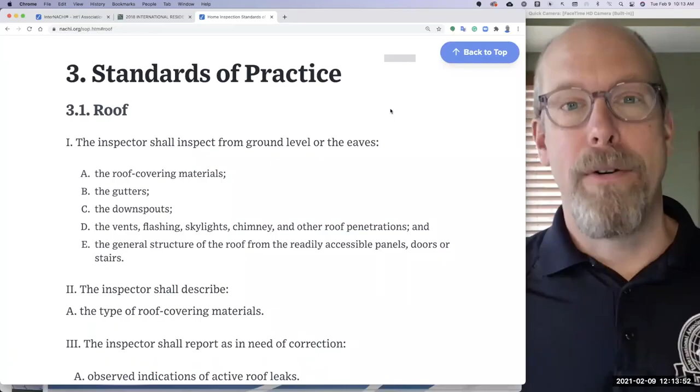If you go to roof, it says the inspector shall inspect from ground level or the eaves. Ground level or the eaves. You're not required to walk upon any roof surface, right?

Here's the roof that I'm inspecting. This is actually the back side of the roof, and it looks like it's nice and shiny, like the sun is beating off of it. Well, it's actually covered with snow. During this inspection of a townhouse, you can see in this picture, the front is hit by the sun. You can see the asphalt shingles, kind of brown in color, but the backside is actually covered with snow. There's a nice layer of snow there.

So the standards of practice, you're not required to walk upon any roof, but I try to. If I can't, I'm not going to. It's incredibly unsafe—a fall from a ladder could be fatal. Do not do it. You're not required to have a ladder. The word ladder is not a required piece of equipment in the standards of practice, so you're not required to go up there. Don't—it's very dangerous. You could break a leg from the second rung of a ladder.

I built houses and installed roofs before I became a home inspector, so I was a home builder. I was kind of familiar and trained in using ladders, tall ladders. I would bring very tall ladders—28-foot fiberglass, 32-foot fiberglass, 12-foot aluminum, 40-foot aluminum, step ladders, and crawl space gear in between. That was part of my brand.

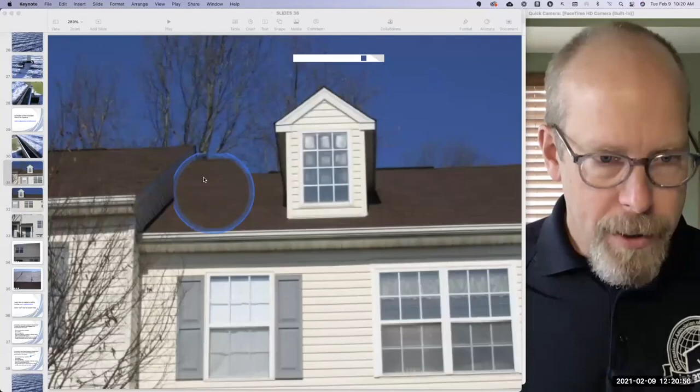I'm not sure if this is a finished attic or unfinished attic, but I'm taking a look at the roof surface here, the shingles here, and there's flashing here. There's flashing at the dormer, flashing here at the front of the dormer, flashing here.

Here's the gutter and downspout for the front, and there's a little porch roof here in the front. Taking a look at that as well. I don't see any missing shingles, so that's pretty good on the front part.

But there is a severe inspection restriction. And sometimes I'll do a video as well, just to record the inspection restrictions with a video.

Now, if you don't know how to inspect a roof, it's okay. If you need maybe a refresher or some continuing education, we have a large amount of education available to members online. Some of the courses, a handful, are for non-members, but one of the benefits of being an InterNACHI member is you have free online, unlimited access to the free online courses at nachi.org/education.

So if you wanted to learn how to inspect a roof, you go to our education page, nachi.org/education, and you enter roof. Let me just show you how to do that. So we go to nachi.org/education. There's a search for courses over here, and you type in roof. And on the right side, you can see many courses pop up.

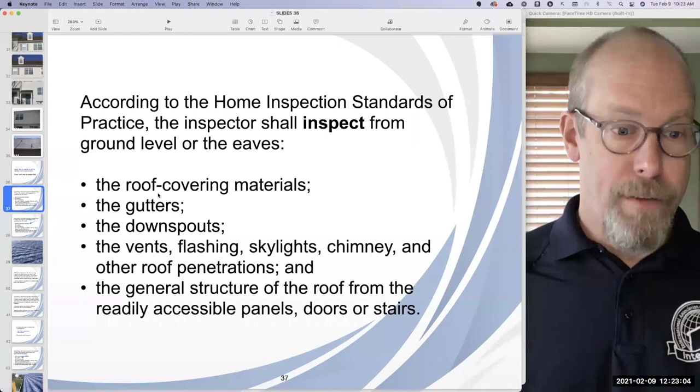According to the Home Inspection Standards of Practice, inspectors shall inspect from ground level or the eaves—not required to walk upon any roof surface—the roof covering materials. It doesn't say roof system, it says roof covering materials, the gutters, the downspouts, the vents, flashing, skylights, chimneys, other roof penetrations, and the general structure.

I have to inform my client of this inspection restriction with pictures, video, and words. Something like this: the visual inspection of the roof covering material was restricted by the snow. I was unable to see the roof covering. I recommend an inspection at a later date when the roof is accessible and the roof covering is observable.

I really don't mention a real estate transaction, not in this sentence. Maybe some other sentence—you could feel free to add this recommendation must be completed or fulfilled or followed before you move into the house, or before closing, or something like that, or within 30 days. You can feel free to add that. This is just an example narrative of me explaining to my client that I really can't see anything.

And if there is a defect here, let's say there's a hole in the roof and it's covered by snow, am I responsible for it? When my client moves in, do I have to pay for that hole in the roof? So no, the answer is you're not responsible for every defect in a home that you're inspecting.

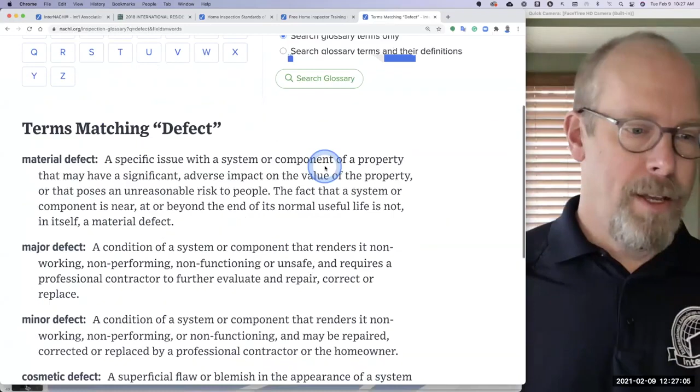So are there other types of defects that I could observe? Sure, it's up to you whether you want to define them or not. The glossary of definitions of terms that InterNACHI provides may be helpful—you visit nachi.org/inspection-glossary and enter the word defect. I'll do it right now. And we're going to search the glossary, and there's material defect, which we just went over.

There's major defect—you don't have to use these terms, remember. There's minor defect and there's cosmetic defect. So in the glossary there are four different types of defects, but you may not want to describe every observation as a defect or not, right? You may want to describe it in a narrative that kind of explains your observation.

What about code violations? Well, a home inspection is not a code inspection. A home inspector is not a code inspector. So you may want to make that very clear in your report, in your agreement with your client, that this is not a code inspection. They're very different. If you pick up the code book, it's inches thick, and everything in the code book is your responsibility when you're a code inspector. That's not what we're doing.

Remember the process—the foundation upon which you build a successful home inspection business is the standards of practice.

So let's see, where are we? We did that, there. So according to the standards of practice, the inspector shall inspect from ground level or eaves the gutters, and we did that. You can take a look at these pictures here of the gutters in the back, at least. And what do you think that is—the red arrow is pointing to?

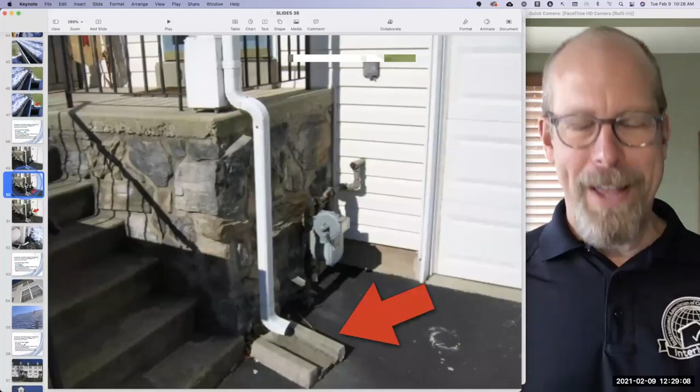I performed inspections in Pennsylvania. It's a cold climate there, and there's freeze and thaw. When there's snow on the roof, it freezes, obviously, and then it melts maybe, and the water comes down the downspout, dumps on the driveway or walking surface, and then it freezes again overnight. So over time, this becomes just a nuisance, a hazard, a trip hazard.

It just creates ice. This is an ice maker right here. Ice makers don't have to be inside a refrigerator. This is an ice maker when the conditions are right in your geographical area. This can just create a huge mess of ice on your driveway right at the bottom of these stairs. So this is going beyond the standards of practice, but I'm going to put it in the report as something to monitor and possibly correct if it actually happens that this is an ice maker.

Ideally, downspouts do not discharge on walking surfaces in any climate, warm or cold especially. I also noticed while I'm walking around inspecting - remember my inspection process right now, I'm doing the roof and then moving down as the water flows: roof surfaces, gutters, downspouts, grading - and I see a gas meter right next to the downspout.

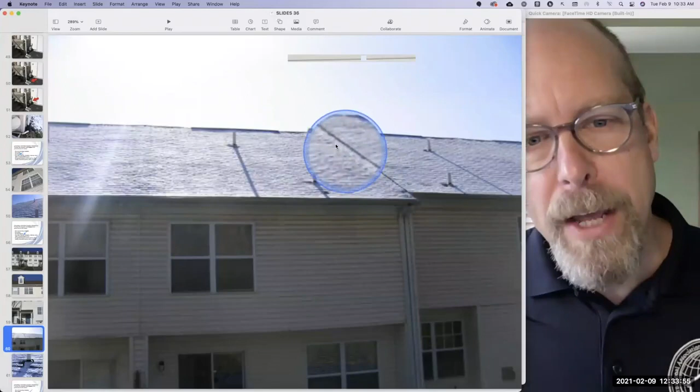So I want to take a look where the two shingle roofs meet. There isn't a stem wall or another wall here. Hopefully there's a firewall in the attic that I can see.

There's flashing around the vent pipes coming up. This looks like the main vent stack there, according to the diameter. No skylights, no chimney since there's no fireplace, but that roof penetration could be considered a chimney. These vent pipes coming through are the roof penetrations, and they're flashed.

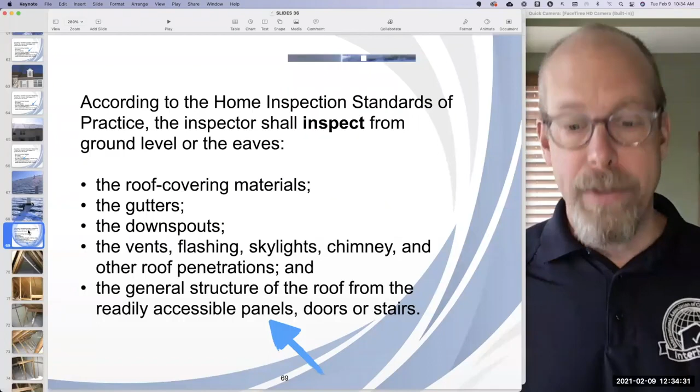We're required to inspect the general structure of the roof from the readily accessible panels, doors, and stairs. That means the unfinished attic space underneath the roof deck, the structural deck. This is a truss-built roof.

These are trusses. There's the vent pipe, one of the vent pipes we saw in the previous picture. There's the firewall in between the two units, and the vent pipe is supported.

The roof structure is plywood. You can see the H-clips. If you don't know what an H-clip is, that's okay - it's covered in the roof inspection course.

There's the truss there, and it's fastened there and there and there. The white stuff is fiberglass insulation, blown-in fiberglass insulation. There's no flooring, so the inspection is restricted in some ways, but there we are.

I don't see any watermarks around the vents. If there is a water problem, it's usually below on the lower part of the sloped deck there.

Plywood with the marking, and the plywood is solid here at the ridge, then it's cut open here. Remember, there's a ridge vent, so we have soffit vents and ridge vents. And there's that window, remember, with the fogged window panes.

We're required to report upon fogged window panes. I'm going to report upon that, even though it's not a livable space.

That's where I park, and that's my truck - you can see the ladders and my van, a great inspection vehicle. I loved having a van as my inspection vehicle. Plenty of room for my tools and a big ladder rack. Our inspectors used vans and big ladders like that, and that was part of our brand. So when we pulled up, we looked big, fully equipped, with a lot of ladders, big trucks.

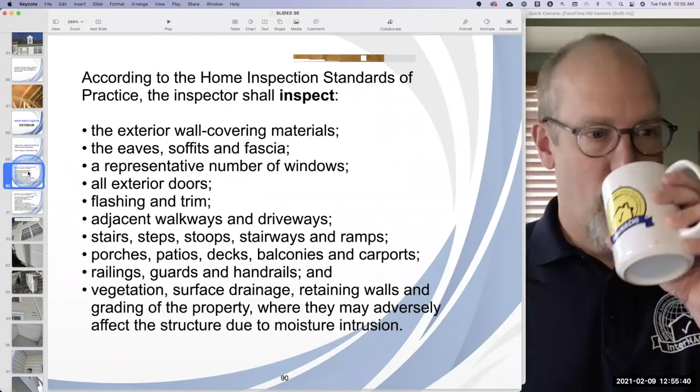According to the Home Inspection Standards of Practice, you're required to inspect the exterior wall covering materials. Remember, we don't inspect the exterior systems or the roof system, because you can't see everything in the system. Where do we get these terms? Code — building code, ICC, International Residential Code — calls it wall covering. We call it wall covering materials. They also talk about different types of materials, material standards, and methods of applying those coverings. So exterior wall coverings is right there in the code.

Interior, it's called interior covering as well. We have interior coverings or wall finishes, or you can combine those terms: interior wall coverings. So be careful with your terminology and how you communicate what you do during an inspection.

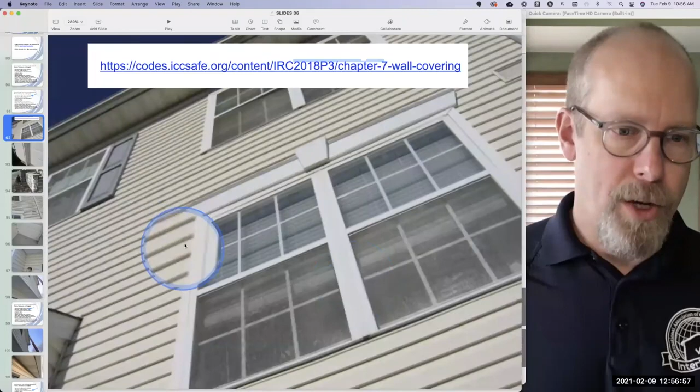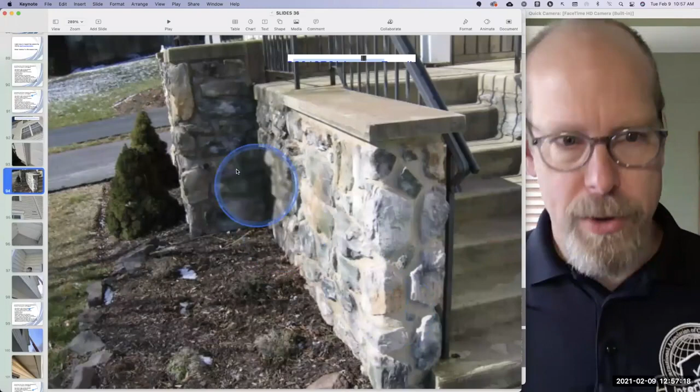So we are at inspecting the exterior wall covering materials. There's vinyl — I see vinyl in the picture, and some aluminum, maybe vinyl windows, some other vinyl and plastic. There's wood, that's a 2x8 maybe, painted. There's some vinyl trim and weather stripping, vinyl siding with a little J channel, an aluminum garage door, and some masonry in the front — stones at the stairway and the walk. There's vinyl siding, some wood there or some other kind of material that could be painted up. There's vinyl that meets a different type of building material — vinyl touching concrete at the rear patio.

Wherever a piece of siding meets something else, I like to get my nose in there and see if there should be some sealant or flashing. We don't want water intrusion — any kind of opening there could be for vermin as well. There's a light fixture capped with vinyl, and where the overhang or the eaves is, it's the same thing. I'm looking at anything where one thing meets another, especially at corners, because problems usually occur around there.

Eaves, soffit and fascia — we just saw that. You're required to inspect the eaves, soffit, and fascia. There's that radon exhaust pipe by my ladder.

That's the soffit vents. A representative number of windows — you're not required to inspect all the windows, especially ones you can't even get to, like the second floor windows here. I open and close a representative number, which is defined by the inspector. For me, it was one window per room, so in the bedroom I'd go to at least one window. I look at all of the windows, but I'd operate one and take a picture of that.

It's all exterior doors. There's an exterior door, a doorbell, a storm door with glass, and there's the exterior door — the main door, the front door, the egress door, whatever you want to call it — and there's the front step.

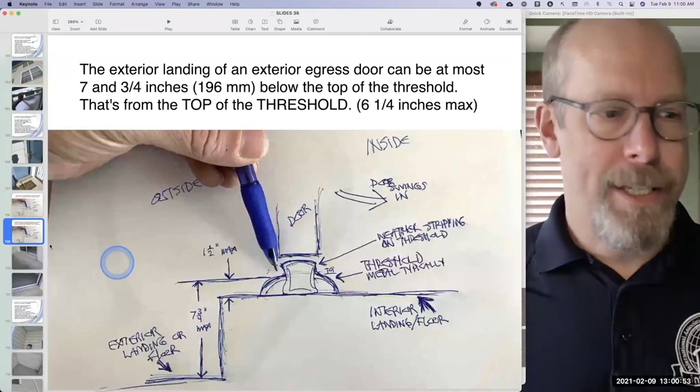That limit starts with the top of the threshold. It's measured from the top of the threshold. So the exterior landing at an exterior egress door, the front door, can be at most 7 3/4 inches tall, but measured from the top of the threshold, not the step itself, which is that 1.5 inches maximum. So this first step is going to be shorter than you might expect. It could be about 6 to 6 1/4 inches tall.

Why do I go over that? Well, it's not a code inspection, but I do better inspections when I know what I'm looking at. All those building components and systems are built upon a standard. And if there's a violation of that standard and I can pick it out during a home inspection, I'm going to make it a defect in my report. I'm not going to quote code. I'm not going to use this illustration. This is just for me to know what to do and look for during an inspection.

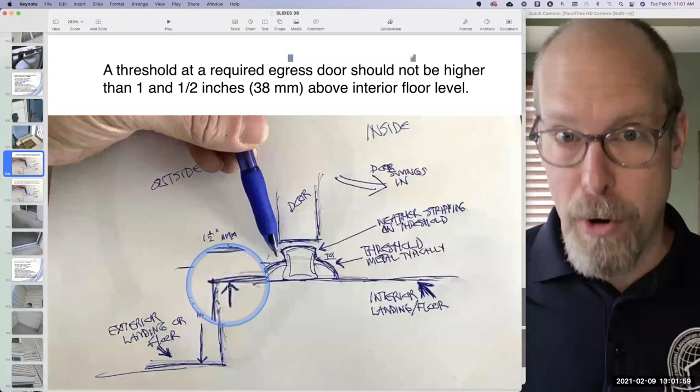So what I'm saying is, if you know a little bit about building homes, that will help you become a better home inspector. If you know how to fix stuff around the house, if you know what a threshold is, that's helpful, right? If you know what the step standard is, what is too high of a step, what is too small of a step or landing, that helps you become a better inspector. I'm not saying you should know code and be a code inspector, although we have that program. I'm just saying it might be advantageous to know more than you need to know that's listed in the Home Inspection Standards of Practice.

Again, the Standards of Practice requires the inspector to inspect the flashing and trim. We went over those areas. I love looking at where two different materials meet, looking for that flashing or sealant or opportunities for water or mice to get in. I don't like openings. So I'm looking, where would those openings be? It's rare that you have a hole in the vinyl siding, right? It's usually somewhere where the vinyl siding meets something else. So I'm always looking at that.

You're required to inspect the adjacent walkways and driveways. Well, we've got a driveway here, no real walkways, there's a public walkway, I'll take a look at that for my client anyway. There's a driveway picture there. The asphalt looks really good. There's a crack, I bet there's some kind of tree root or something underneath. No big deal, it could be sealed up. And there's the front, that's a clean-out pipe for the sewer line. And there's the sidewalk there, no problems with the public sidewalk. Again, not required to inspect public sidewalks during the inspection according to the standards of practice, but I do.

Stairs, steps, stoops, stairways, and ramps. I think that's pretty inclusive. So here's my front stairway. Remember the downspout here and the gas meter next to it.

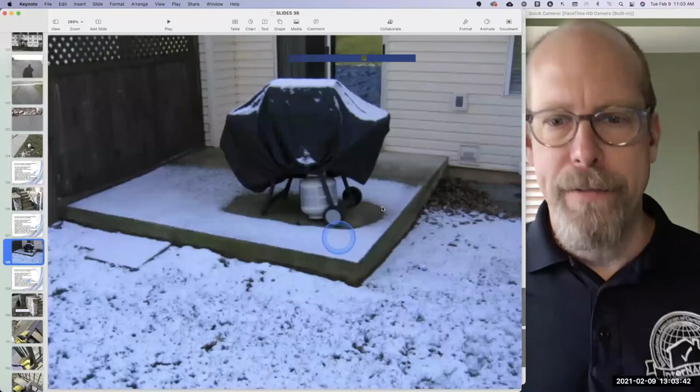Porches, patios, decks, balconies, and carports. We don't have much. We've got this concrete slab in the back for a porch, and it's slanted away. Might be slanted a little bit too much. That's okay, I'm not going to call that out. But there's a slope to it in the correct direction away from the house.

That's good. Railings, guards, and handrails. Well, we've got this front handrail here. And if you notice, that's kind of cool, right? So they have the original iron handrail, and it went past this concrete cap, but it would crush your fingers right here where the two meet. So they added a secondary handrail that's attached on the inside. That's nice, I just pointed that out.

If you wanted to know more about handrails, grippable handrails, when a handrail is supposed to be installed, how high or low is too high or too low, we refer to the International Residential Code, that's Chapter 3, Section R311.7.8. Let me just show you.

Code is kind of fun. It says handrails shall be provided on not less than one side, at least one side of each flight of stairs with 4 or more risers. Code says things in a weird way.

The handrail height is measured vertically from the sloped plane adjoining the nose of the treads. The tread, the step, has a nose -- where your toes would overhang. From nose to nose to nose, you can draw a line, that sloped plane, or the finished slope of a ramp.

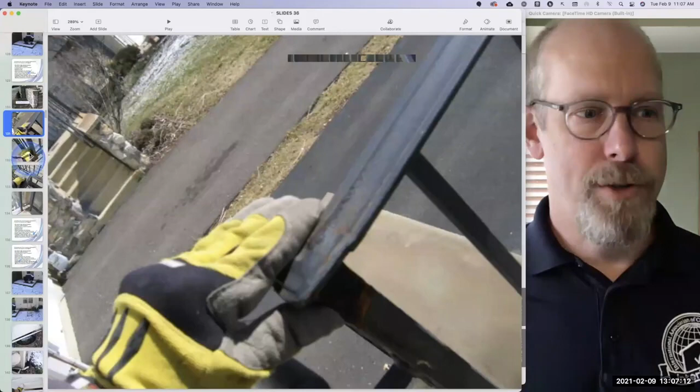Hope that makes sense. On the handrail here during the inspection, there's rust. That could be scraped off -- it's not structural yet, but if left go it could be. It could be scraped and painted again.

Vegetation, surface drainage, retaining walls, and grading of the property -- very important. Remember, at the beginning of this inspection, I was looking at the snow-covered roof from the hillside behind the townhouse. I'm concerned how all that water during a heavy rainstorm slams into the house foundation. It's kind of flat here, and there's a window well.

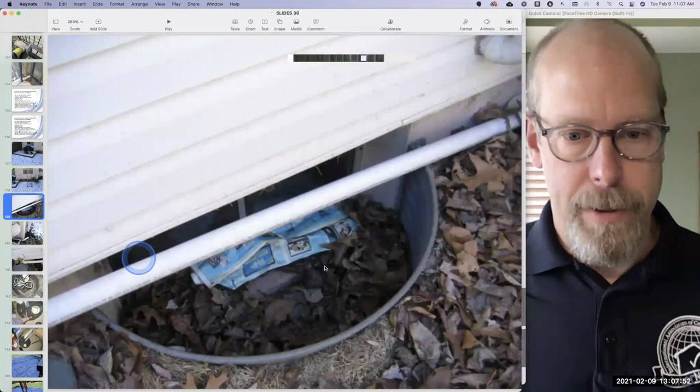In the basement, which is a full story below the surface of the ground, I'm going to look for water penetration. This needs to be cleaned out -- there's a window well just filled with debris. Not good, it needs a cover or to be cleaned out.

I know why there isn't a cover -- this is a crappy way to install a sump pump discharge pipe, right across the window well. There's that discharge pipe going into the underground downspout we saw earlier, and there's the pipe at its penetration through the siding. Needs to be sealed up. And that's the sump pump.

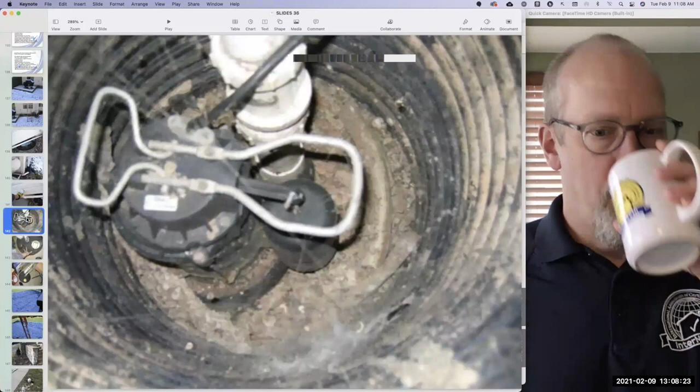The sump pump is in the basement, there's the pump there. I'll usually report when there's water, standing water, or even if it's dry, but especially if there's standing water. The sump is sealed -- I was able to take the cap off here.

It's sealed because there's a radon system installed, and we'll go over that as well. This is a great opportunity for you to turn around to your client and say 3 magic words.

That makes you more money while I'm here. While I'm here doing a home inspection, would you like me to schedule a radon test to make sure this radon system, which was installed and tested at installation, is still performing as expected? Boom, $150.

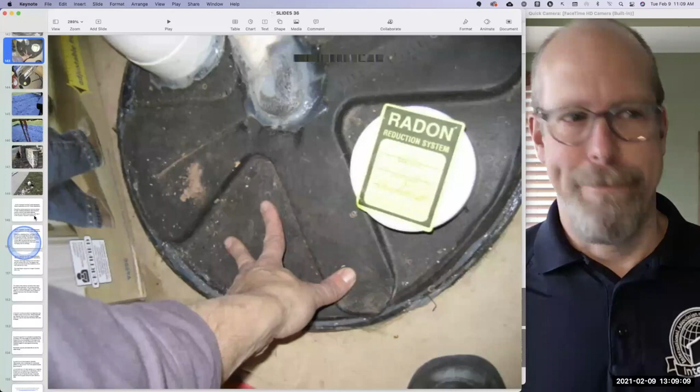So there's the radon system there. There's the grading -- I'm glad this sump pump doesn't have any water in it, because there's a swale behind the townhouses to carry ground surface water away from the properties, away from the foundation. That's good. And the grading in the front is okay, just flat.

Again, home inspectors are not code inspectors. But everything home inspectors look at relates to code, building standards, best practices, building science, and safety features. So knowing more about those topics helps a home inspector do better inspections.

For example, at the front door, check the landing -- it should have at least 36 inches in the direction of travel, and the exterior landing shouldn't be more than 7 3/4 inches below the top of the threshold. Remember, we checked that. The stair riser height shouldn't be more than 7 3/4 inches, and the biggest riser shouldn't exceed the smallest by more than 3/8 of an inch. The tread depth should be at least 10 inches -- it could be bigger, but no smaller.

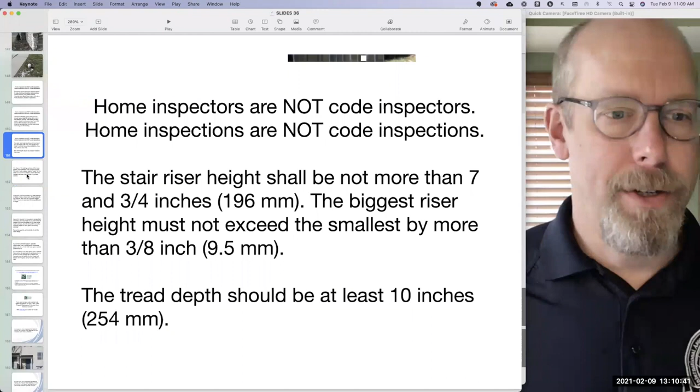And the slope of the walking surfaces of the steps, the landing, the walkways, even the steps that we saw, the concrete steps with the double railing, must provide drainage. The step itself should be sloped. The use of such a slope is called a wash.

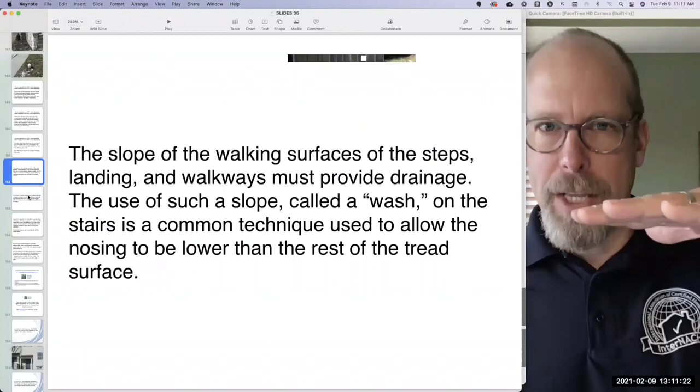It's on the stairs, and it's a common technique used to allow the nosing, remember the front edge of the step, to be lower than the rest of the tread surface. So if it rains on the exterior steps, it should be gently sloped, the wash, so that it can drain away.

A handrail should be on at least one side of a flight of steps of 4 or more risers. Where handrails are required, they should be at least 34 inches, but no greater than 38 inches, measured in that diagonal way.

And a guard is required if an elevation is greater than 30 inches in height at any point within 36 inches of the edge of that walking surface.

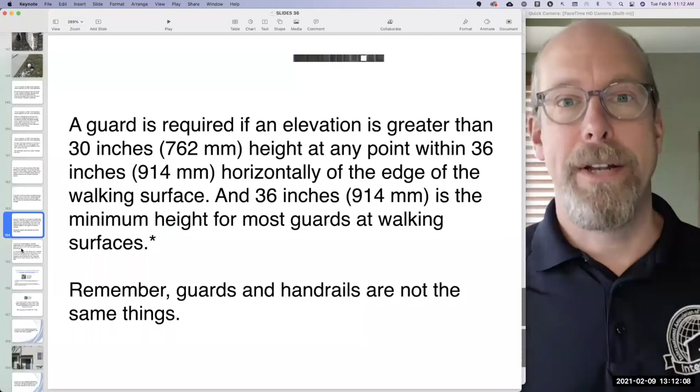Remember, guards and handrails aren't the same things. A guard is a guard, and a handrail is that which you grasp. Now, the top of the guard could be serving as a handrail, but a guard is different from a handrail. And you can't allow a 4-inch sphere to pass through a guard.

So why do I mention all that code stuff, just on stairs and steps and handrails and all that? Because it's a large part of what you do. You inspect steps, handrails, safety features, things like that.

And it's based upon InterNACHI's training, and InterNACHI's training is based upon code. InterNACHI is a preferred education provider approved by the International Code Council. The ICC is the group that writes all of the building codes, all of them. And InterNACHI's curriculum is based upon the International Residential Code.

Our curriculum is based upon the most recent code. It's reviewed every other year and revised and updated according to the code changes, which happen every 3 years. So when you take an InterNACHI course, you know the most recent standards by which to serve your clients.

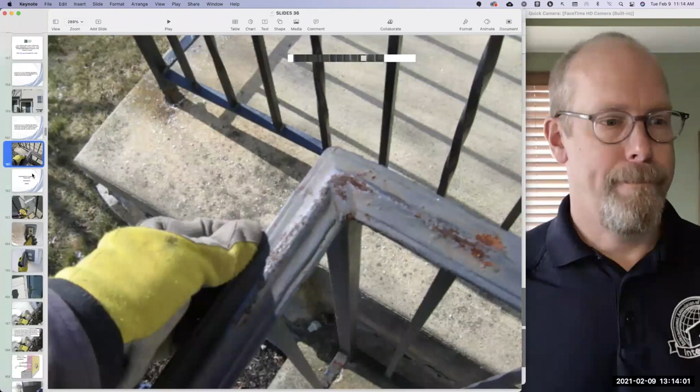And then there's GFCIs on the outside. You can incorporate this into your report under electrical or maybe exterior, it's up to you. And all exterior receptacles should be GFCI protected.

The doorbell, I once got a call back because the doorbell doesn't work, right? And that's okay, I tried to explain that's not part of the inspection. And then I realized, well, why don't we just incorporate doorbells into our inspection process? So now we ring doorbells.

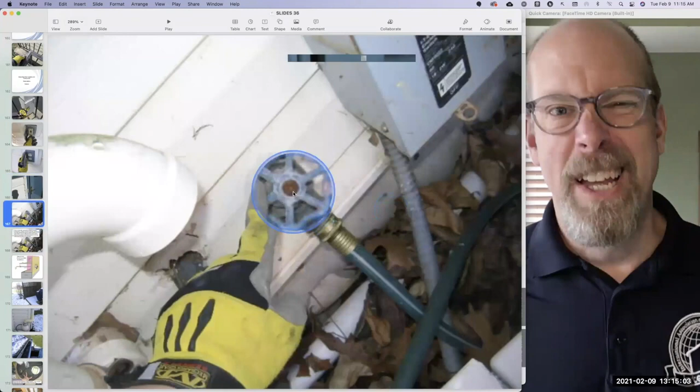We also run faucets on the outside. They're called hose bibs, hose spigots, whatever you want to call them. But they should be frost-free, especially in cold climates. So that's a hose bib.

And ones that are subject to freezing temperatures, including frost-proof hose bibs, should have their stem extended through the building insulation into an open, heated, or semi-conditioned space. There should also be an accessible shutoff valve installed on the water supply pipe that leads to that hose bib. And it looks like that.

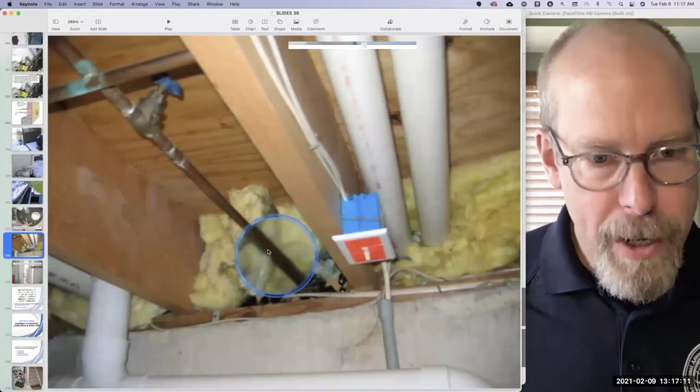Oh, there's that shutoff valve for the frost proof, but this actually wasn't frost proof. I can see on the stem here that there isn't any frost proof feature, so it isn't a frost proof hose bib. I'm going to mark that as a defect.

And there's the gauge there to show that there's some kind of pressurization going on inside the system.

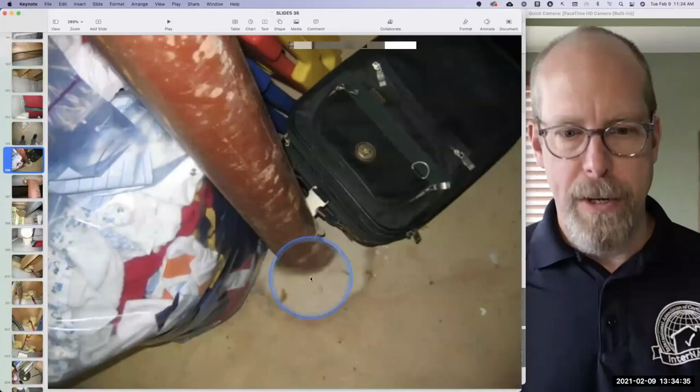There's the load-bearing pole post - the bottom of it is secured, top of it is secured. There's the central I-beam resting upon the foundation. That looks good. There's the clean out.

I think it may have leaked in the past and stained the vinyl around this clean out. That's okay. There's my 3-tine hoe gardening tool, moving insulation to look at the band rim joists, especially if there's a sliding door.

I want to go underneath that, or a deck attachment - I want to get to that area. Looks good, insulated. I see some joist hangers.

There's the sealed sump pump pit. We talked about the depressurized system of the radon system, and me saying the three words while I'm here in order to make more revenue for my company.

I'm required to describe the type of foundation, the location of the access to the underfloor space, poured concrete, reinforced.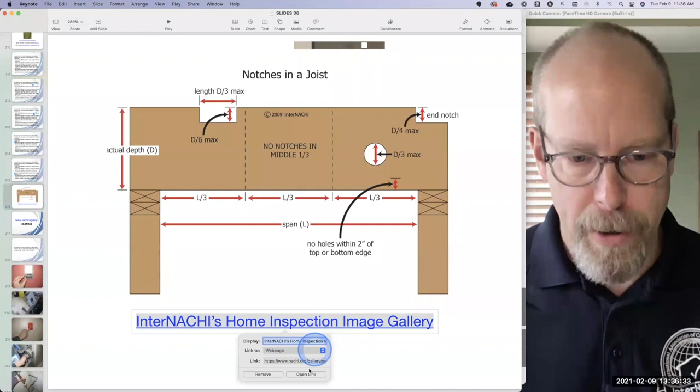To help learn what to look for and explain what you find to your client in a report, use an InterNACHI illustration - these are really great. At InterNACHI's Home Inspection Image Gallery, you can look for anything you want to spice up your communication skills and your report. This is a high-def illustration that you can download.

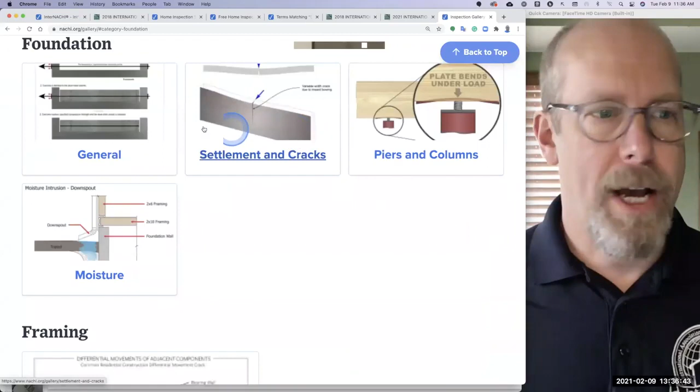And if you wanted to download all kinds of things, like maybe you saw some structural cracks - that's a cool one there - just to help you describe your observations to your clients. That's what InterNACHI provides, those really nice illustrations. Let's get rid of some of these tabs.

Heating system is the next one.

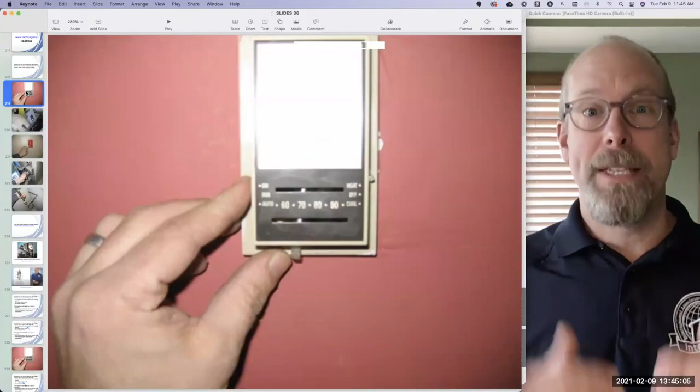So when I teach home inspectors to compete in the market, what I tell them to do is spy on your competition and make a list of all the things that they do, and see if you do them and more. Because if you're both doing the same thing and you both look the same, you sound the same, then the only distinguishing characteristic is price.

And lowest price wins, and that's no good for anybody. Competing on price, everybody loses. What you need to compete on is value. And sometimes value is defined by being very different than all the rest.

Not always, but usually. I had a class about growing pumpkins, award-winning pumpkins. What you want to be is the biggest, most different, most grand pumpkin in the field. No one looks at the small pumpkin that looks like all the others. Everyone is magnetically drawn to the most distinguishing, different-looking pumpkin in the field.

So you may have a huge advantage that you can take advantage of. Hope that makes sense. And find your mentors, InterNACHI has a mentoring program.

Are we doing the heating system using normal operating controls? Normal operating controls are thermostat, shutoff valves, shut-off switches, that's the emergency shut-off switch, that's the service switch, and that's the gas shut-off valve.

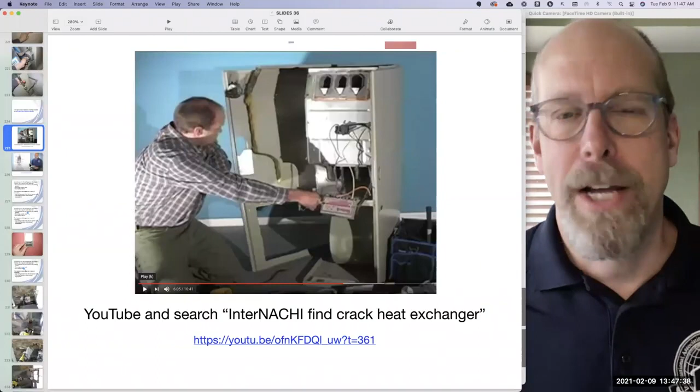So go to our YouTube channel, or just go to Google, go to YouTube and search for InterNACHI Find Crack Heat Exchanger. That's a good video. We also have videos on the categories.

There are 4 categories of heating systems, furnaces, and you have to know what you're looking at. So from 20 feet away, you should be able to tell your client if it's low, medium, or high efficiency, and what type of heating system it is.

Is it a boiler that moves hot water around? Is it a ductwork heating system? Is it a furnace, forced air furnace? Does it have condensate building up and it needs to drain onto the condensate?

You should be able to see that from the distinguishing characteristics. We have a really nice course on HVAC units, and inside the course there's a video on inspecting, distinguishing, and describing the type of heating system you're inspecting. There's a checklist, a video on the cracked heat exchanger, and a video on the types of heating systems you may come across.

You have to describe the location of the thermostat, which is right there, and the energy source. Remember the gas meter in the driveway hazard? Yep, natural gas.

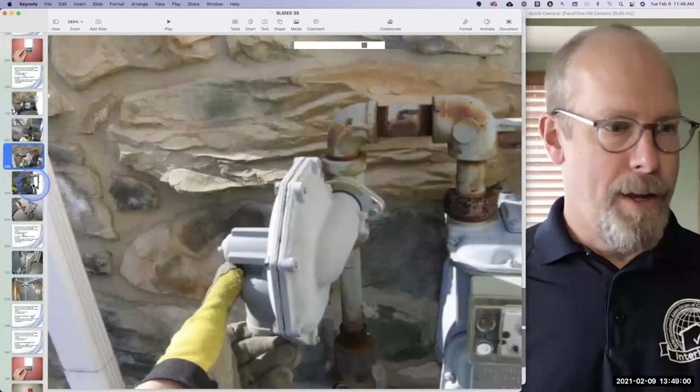I wouldn't worry too much about the surface rust. There's a gas shutoff valve, pressure regulator, gas lines, and another gas shutoff valve next to the heating system itself, the appliance. The heating method is forced air, and there's ductwork.

Report as in need of correction any heating system that didn't operate and any heating system deemed inaccessible. I didn't have any problems there; everything kind of worked out.

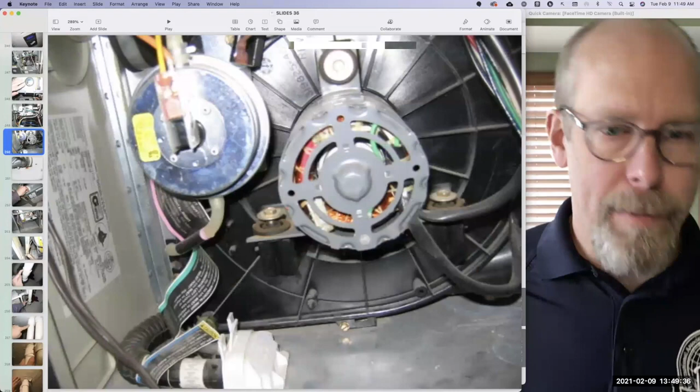There's the heating system, a Carrier model. There's a draft inducer fan, a sealed heating chamber, combustion chamber, a pilot light mechanism, and some pressure regulators and safety devices.

There's a drip coming out of the draft inducer fan, where the fan is attached to the exhaust pipe, and there's condensate in there dripping. To get to the air filter, you have to take out the nut there, and there's the air filter, and it's all bent.

So that's a defect, a minor defect. There's a problem with the exhaust pipe.

Remember, it produces condensate. This is a high efficiency unit furnace, and there's condensate watermarks on the outside of the exhaust pipe. It's PVC exhaust pipe, low temperature, produces condensate, and it's cracked.

Not only is it cracked, it's not glued well, and now it's a hazard. In fact, it's a material defect, because if this starts to exhaust CO into the house, people are going to die. So in this home inspection, I actually have a material defect.

It's that little crack right there. Not big, but there's a little crack. How did I find that crack? Because of the watermarks. How did I find the watermarks? Because I looked at the components and I knew what type of heating system it was.

It's category 4, high efficiency, condensing furnace. Water condenses in this type of furnace in the exhaust pipe by the fan, and I saw the watermarks. To find this defect, you have to know how things work.

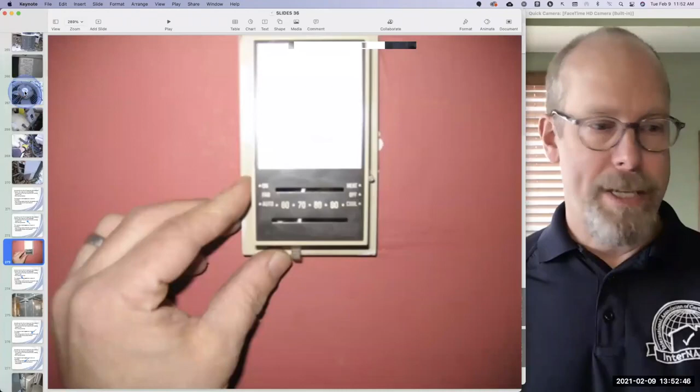Describe the location of the thermostat for the cooling system. It's the same thermostat as the heating system for this house. The cooling method is ductwork, same system as the heating system.

Report as a needed correction any system that didn't operate, or if the cooling system was deemed inaccessible. No big deal, everything was accessible. There's a refrigerant line we saw on the outside going to the evaporator coil on the inside.

There's a condensate pipe coming from the tray underneath the evaporator coil. There's probably an A-frame in there, and it drains down, and it's also picking up some condensate coming from the high efficiency furnace. Does it drain into a sump pump? No, it drains into the basement perimeter drain.

That's okay, but ideally you want it to drain into the sump pump, which is right there, or maybe a condensate pump itself - a little plastic thing that sits next to the furnace, collects the condensate water, and discharges it outside. You don't want it draining as it is, because you're just introducing moisture and standing water puddles into your basement.

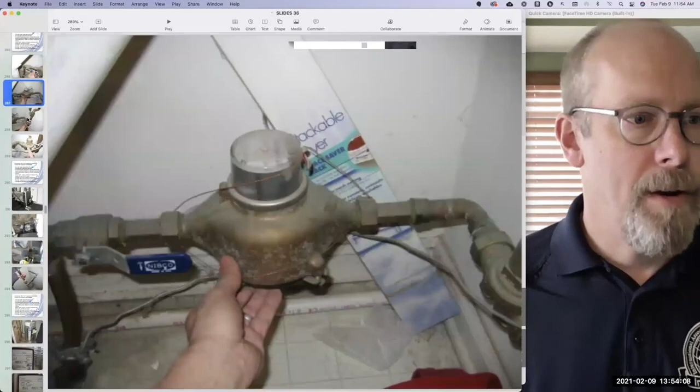Plumbing is the next system. You want to inspect the main water shutoff valve for the plumbing system, and there it is. My hand is on the ball valve, and there's the water meter, public water line. There's a jumper cable, pressure and check valve.

The main fuel supply shutoff valve. Remember the meter on the outside, hazard location? There's a shutoff valve there, and there's also a shutoff valve near the appliance of every fuel burning appliance. There should be a shutoff valve.

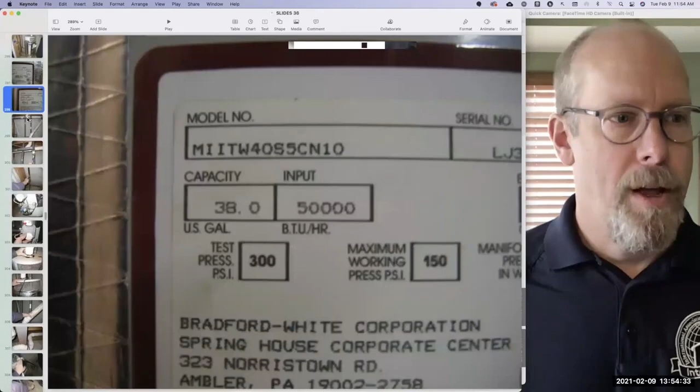Water heating equipment, including the TPR valve. There's the water heater. Picture of the label, picture of the capacity. Shutoff valve for the water coming in, shutoff valve for the fuel coming in.

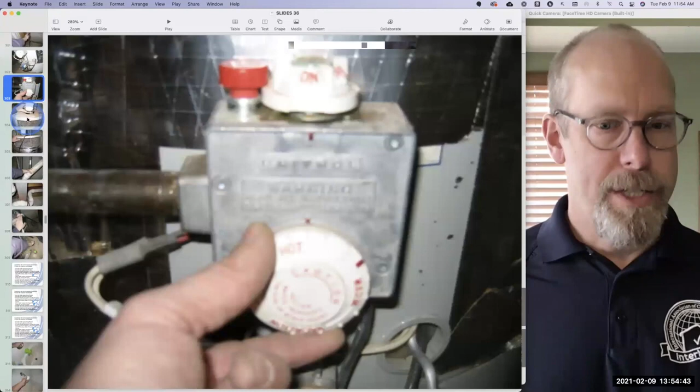There's a temperature gauge. I touch it, but I don't move it. I just take a picture of it and how it works so I can explain to my clients how things work. There's a draft inducer, exhaust pipe going outside, and the TPR valve on the hot water tank extended to the floor, and it's not leaking. So that's good.

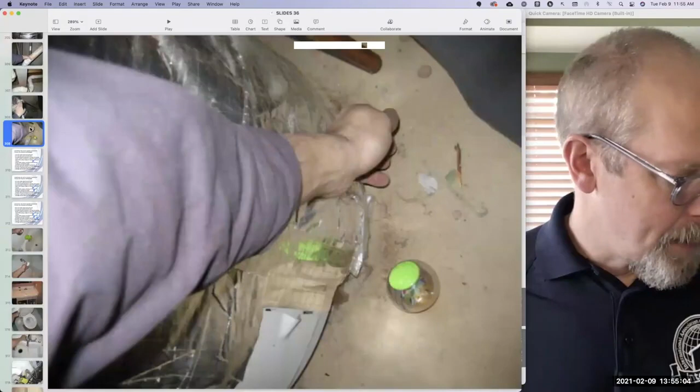You want to inspect the interior water supply, including all fixtures and faucets by running the water, all toilets for proper operation by flushing, and all sinks, tubs and showers for functional drainage. So we do that. There's a tub, there's a shower, there's a sink, toilet. I take pictures of everything that's operating and flowing, all the fixtures.

Not that one that has a hose attached to it. I won't detach that hose, but that has a problem because it's not frost proof. Remember that. And there's the garage faucet.

You want to inspect the drain waste vent system. We see that there, in the attic. So from the roof, there's the terminations from the roof going through the attic, down into the fixtures itself, from the second floor to the first floor to the basement.

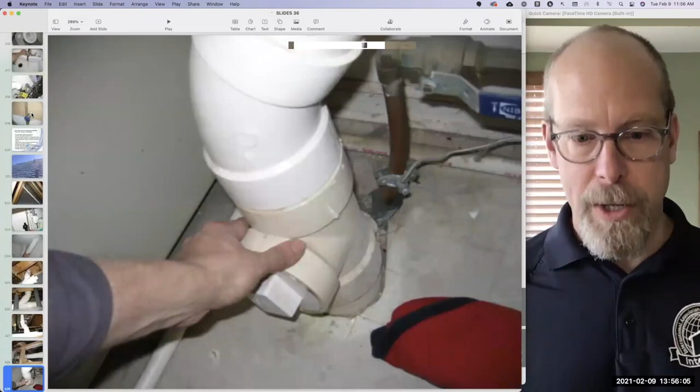There's the basement drainage pipes. You can't see everything, but the fittings that I can see all look good and supported, and there's a clean out fitting there, which has a plumbing leak. So that should be fixed.

And drainage sump pumps with accessible floats. Well, there's kind of like a drainage area there. Sometimes there's a sump pump there. That's a problem with the window well, but there's the discharge with the underground downspout discharge pipe there from the sump pump. There's no standing water at the time of the inspection, and it's part of the radon pit depressurization active system.

Describe whether it's public or private. Well, if you have a water meter like that, it's public. Location of the main water shutoff valve, we already saw that, right there by the meter. Location of the main fuel shutoff valve, it's right there.

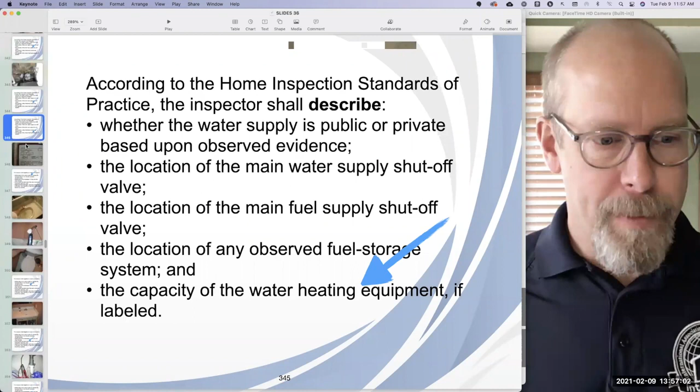Location of any observed fuel storage equipment system — we don't have any, like an underground oil storage tank, or hopefully it's not underground, or a propane tank. The capacity of the water heating system equipment, 38 gallons. Take a picture of that.

Report as in need of correction any deficiencies in the water supply by viewing the functional flow in two fixtures operated simultaneously. So what I do in every bathroom is I turn on the sink, turn on the shower, flush the toilet — that's three fixtures. And I take a look to see if there's any problems with the functional flow coming out of the shower head.

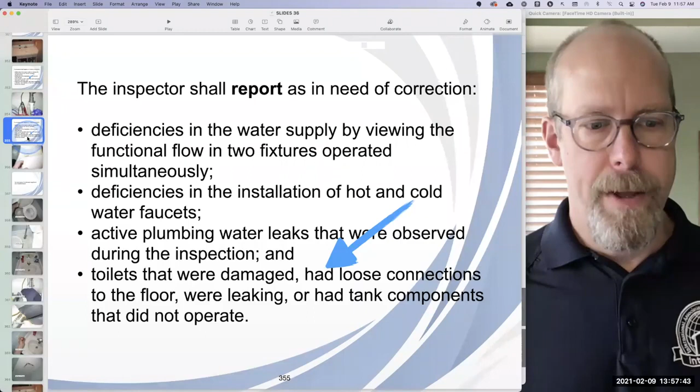Deficiencies in the installation of the hot and cold water faucets — hot on the left, cold on the right. Active plumbing leaks? Nope, I didn't see any there. Any toilets that were damaged? Yeah, I actually had a damaged toilet seat on that one.

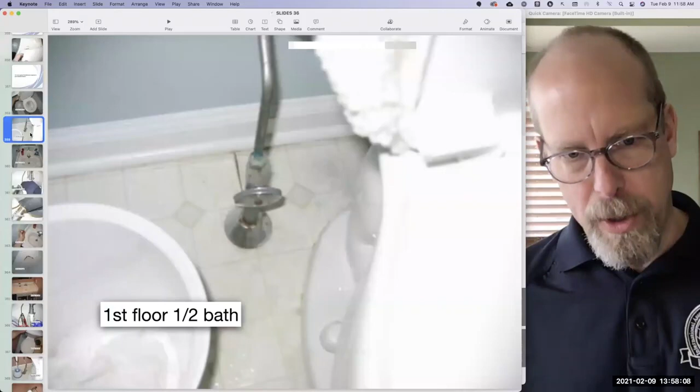You could group the bathrooms together in your inspection report, or put them all under plumbing, or maybe under interior. So this is the first floor half bath. That's the toilet, that's the valve. I push against the side of the toilet with the side of my leg to make sure that the toilet is secured to the floor. There aren't any problems with the wax ring.

And I look at the valve, see if there are any water problems there, any leaks. I use the dry hand, my palm, and I wipe the bottom of the valve, and also wipe the bottom of every water trap to see if it's leaking on my hand. Best tool — don't leave home without it.

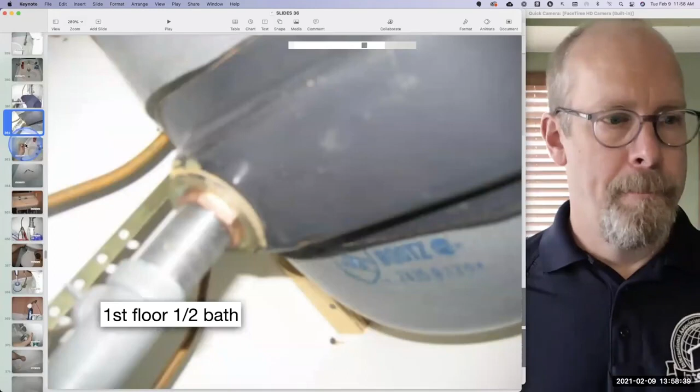First floor half bath sink. Check the bottom of that sink and also the drain pipes. And then GFCI — every bathroom receptacle, GFCI. First floor half bath vent.

Second floor half bath, second floor full bath. There's hot and cold water, no plumbing leaks, flush the toilet a couple times. There's the shutoff valve for the toilet, functional flow from the shower.

There's the tub, tiles. I pound on the tiles with my hand, even take a picture of it. Sometimes my hand goes through, but that's no big deal, you grab the soap dish. If there's something to hold on to, make sure you pull on that. A couple hundred pounds, it should be able to hold in any direction, just like a railing.

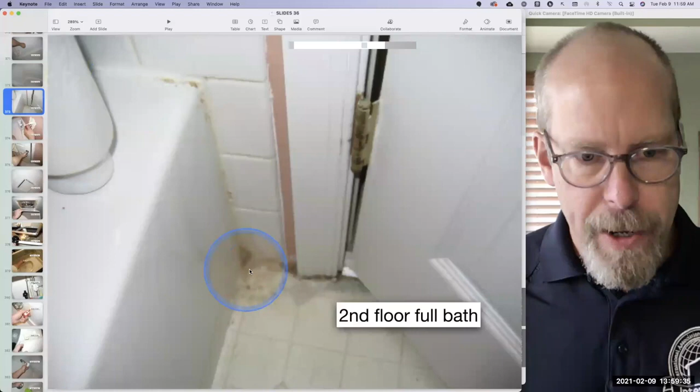Second floor full bath has some watermarks at the bottom corner where maybe some of the shower water from the shower head kind of drained there. There's some watermarks on the vinyl flooring. I don't see any wood rot, but I like to press my hand and my foot right there just to make sure that there isn't any water damage.

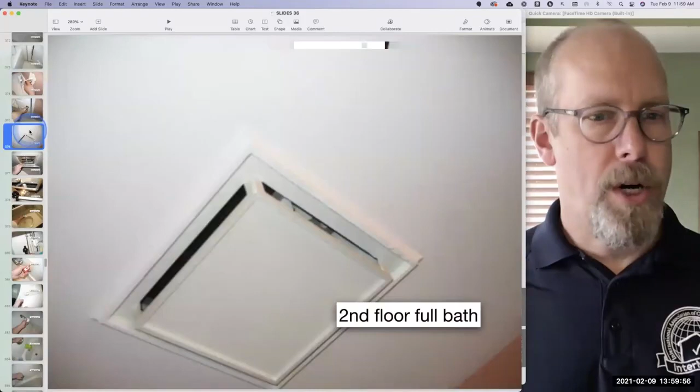Second floor full bath, GFCI protection. There's the door, an exhaust fan. And if there's a plumbing access panel behind the shower or tub, I'll take a look at that to see if there are any plumbing leaks. I'll use that. There's a trap there, no plumbing leaks.

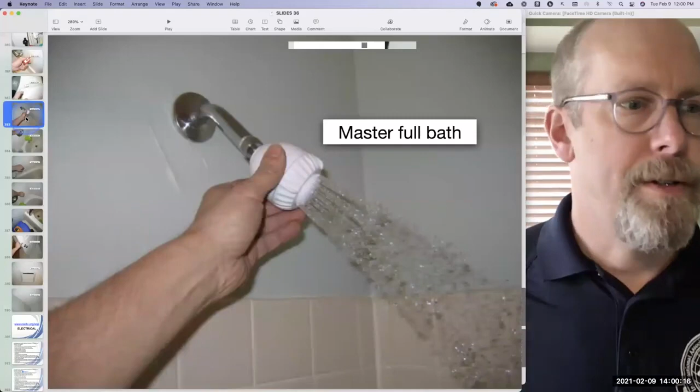Master bath. There's the sink, no leaks at the trap, GFCI protection. Master bath has that crack in the toilet seat, and the functional flow is good.

Tile, pounding on the tiles, the grout looks good, the sealant looks good. There's no problems here at the corner where the tub meets the wall and the floor. The door is okay, fan turns on. No watermarks. Electrical.

Brent says, I use your template that I slightly customize on Spectora for all my inspections, really great software with automation. Cool, I'm glad it helped. Justin said the same thing. I've been using Spectora for a really long time.

I like the template. I'm curious if I can combine the heating and cooling system into one category on the template since I'm in Florida. Yeah, they're all customizable. Everything is customizable, so it works really well for me, may not work at all for you, and that's okay. But every software should be customizable so that you can change the heading, the colors, the size of the font, the number of pictures, and the groupings of chapters or sections or parts or systems. No matter how you like it, you can have systems, like you're inspecting systems, and then within the system you can have components. You can also inspect by rooms too.

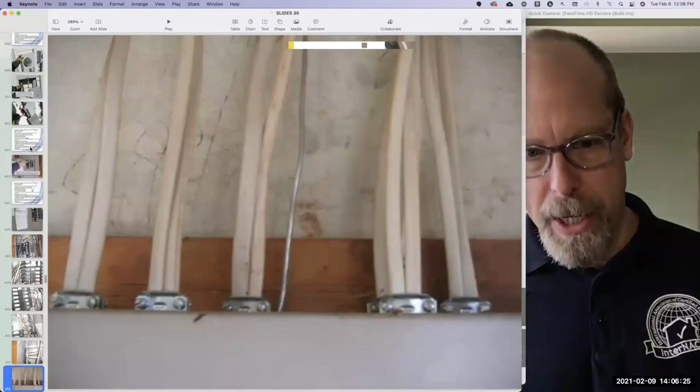Some of us exceed that standards of practice. I pull the dead front cover off when I think it's safe to do so, and I can be consistent with all my clients in doing that. Now take a look at the wiring inside.

Service grounding and bonding. Now the upper end of the electrode, the grounding rod, should be flush with the ground or just below the ground surface so that the end of that rod and attachment are protected from damage. If you find a rod sticking out of the ground, that's a defect. It should be at or just below the soil surface.

We also go over bonding. There's a bonding jumper wire. Bonding is required where needed to ensure electrical continuity and the ability to carry a fault to a path to grounding. And the metal water pipe must be bonded to the service equipment enclosure.

So electrical bonding and grounding is difficult to understand. No problem, we have training for home inspectors. Inside, there's a chapter on grounding and bonding inside the How to Perform Residential Electrical Inspections course, and that's a free online course for InterNACHI members.

According to the standards, you have to inspect a representative number of switches, light fixtures, receptacles, things like that, and AFCIs if they're installed. GFCIs, you have to inspect the GFCIs and test them.

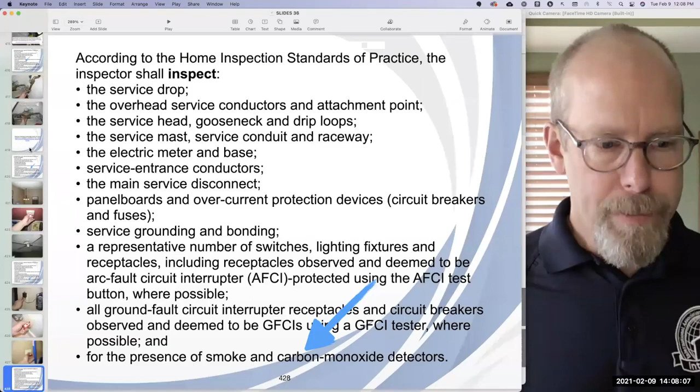And you have to inspect the presence of smoke and carbon monoxide detectors. Smoke alarms must be powered by the building wiring and a battery backup. They should be interconnected so that one alarm activates them all. And they need to be in each bedroom, outside each sleeping area, on each story, including the basement.

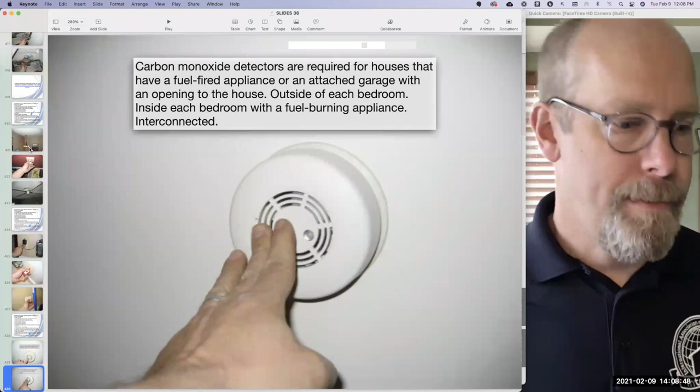Carbon monoxide detectors are required for houses that have a fuel-fired appliance or an attached garage with an opening to the house, so that's many homes. They're required to be outside of each bedroom and in each bedroom with a fuel burning appliance, and they need to be interconnected. And you have to describe the main service disconnect's amperage rating, but only if it's labeled, and the type of wiring observed.

So there's 100 amps. I use one finger for 100, two fingers for 200, 1.5 for 150, obviously. Type of wiring observed is the NMB.

Report as in need of correction any problems with the integrity of the conductors, the insulation, the drip loop, vertical clearances from grades - no problems there. Any unused breakers that weren't covered up - no problems there. Any tested receptacle that had problems, wasn't live, polarity was incorrect, cover wasn't in place, GFCIs weren't testing properly, any evidence of arcing, heat, or melting, or the receptacle wasn't grounded or not secured, report it as a defect in need of correction.

And the absence of smoke and/or carbon monoxide detectors - we didn't have any problems there. The next section is fireplace. We don't have a fireplace, we don't have a chimney.

The next system is attic, insulation, and ventilation. At this moment, if I get into the attic after about two hours into my home inspection, I know I'm doing good because I've given myself three hours to perform the entire inspection. So remember, I did the roof and exterior.

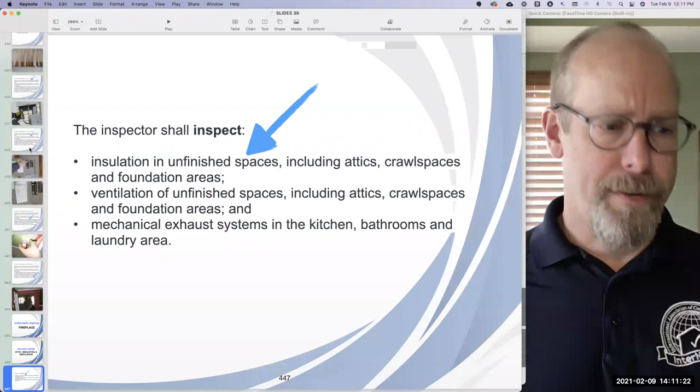The inspector shall inspect insulation in unfinished spaces, including attics, crawl spaces, and foundation areas, and ventilation in those same areas.

So I get into the attic, can't really crawl around too much - there's no flooring, so I'm standing on roof trusses. I don't see any modifications, cuts, or damage to any truss components or chord. I take a measurement of the insulation - it's about one foot thick, really good.

And then all the mechanical exhaust systems - that's for the kitchen, bathrooms, and laundry area. In the kitchen I have my little microwave tester - you put it in there with a cup of water, turn it on, and it glows. It's the shock and awe of doing a microwave test. Every bathroom should be exhausted outside, with some exceptions for windows.

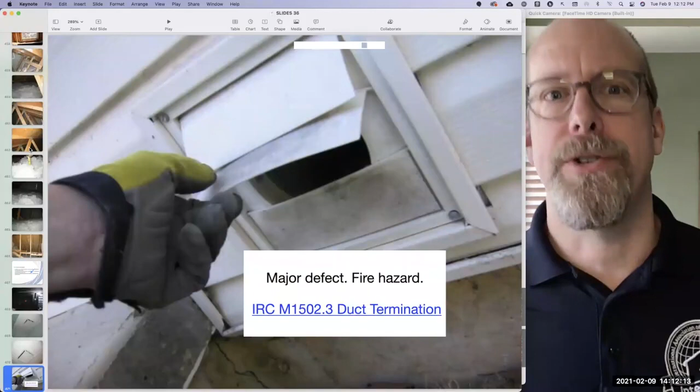Here's the dryer exhaust, the mechanical exhaust system for the dryer. You shouldn't have any restrictions to the flow - you can't, it's a fire hazard. Usually there's problems with older homes and the exhaust hood, the termination of the mechanical exhaust for the dryer - so it's not a screen, but it is a restriction and it really shouldn't be there. You can take a look at fire hazards and major defects and how they're described in the code, at the International Residential Code, Chapter 15, section 1502.3, duct termination.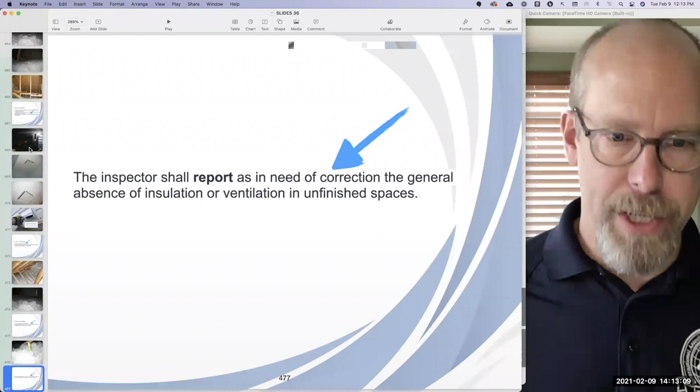The inspector shall describe the type of insulation observed - fiberglass blown in - and the approximate average depth of the insulation. I like to measure it and take a picture, that's in my report. Inspector shall report as in need of correction the general absence of insulation or ventilation in those unfinished spaces. It's all looking good.

And I'm doing the interior - doors, windows, and interior, a representative number of windows and doors by opening and closing them. Floors, walls, and ceilings, stairs, steps, landings, stairways and ramps, rails, guards, and handrails, garage doors. So open and close windows and doors, a representative number.

I find a crack in one of the windows. This door lock doesn't work. The fan turns on, that's good. Take some pictures of the interior - a little cosmetic defect, a blemish there by the railing. The door is looking good. Ceiling lights, wall receptacles, windows, slider door. And I like to check the ceiling on the first floor that's underneath the bathrooms upstairs.

Inspector shall describe a garage door as either manually operated or with a garage door opener. We have the 10-step checklist on how to inspect a garage door opener, and there's the opener itself.

Got to report as in need of correction any improper spacing at the guard, the intermediate balusters of the guard or railing, whatever you want to call it - spindles for the rail, spindles and rails for steps, stairways, guards and railings. Photoelectric eyes need to be operated properly, and you can trip them with your foot.

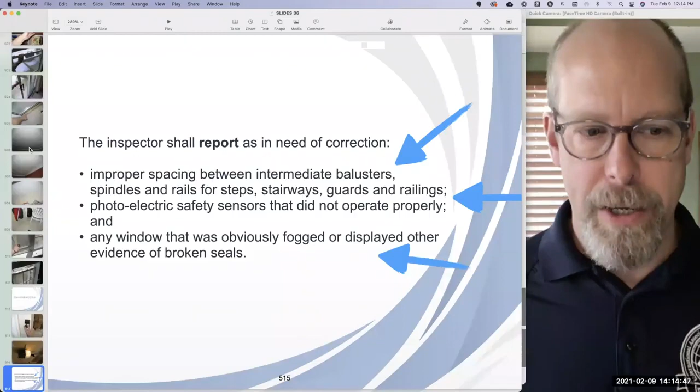Or any window that was obviously fogged - remember in the attic we had those fogged window panes, or displaying other problems like broken seals or cracks. There's me testing the garage door laser eyes. There's a fogged window pane there, second floor bedroom. There's another one - there's a crack in the window pane there.

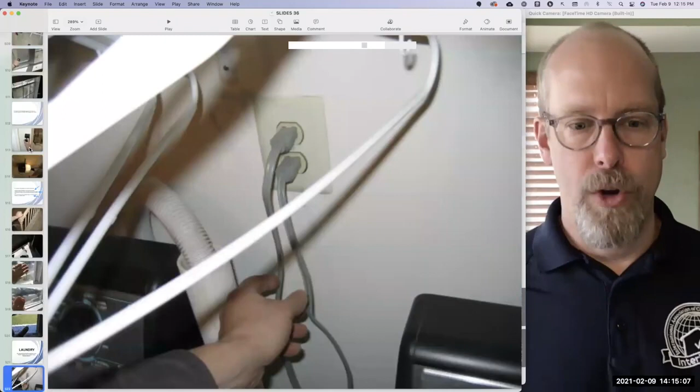Laundry - you may want to include the laundry in the interior section or as a separate room that you inspected. GFCIs are required in the laundry now. There's the gas-fired shut-off valve for the gas-fired dryer. The rubber hoses, they're just not reliable - should be pressure-tested hoses. There's the hot and cold water shut-off valves - they're missing their caps around the drywall. I forgot the technical term, it's escutcheon.

It's something like that. The little caps around there, you like to see them right around there because it's just a cosmetic kind of thing.

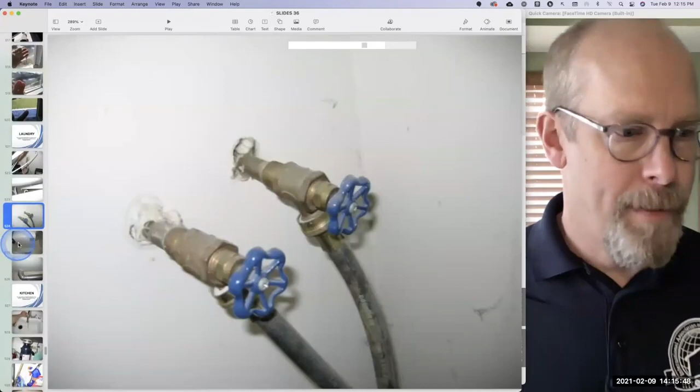You want to see a pan underneath the second floor clothes washer, especially if it's on the second floor, just in case there's a plumbing leak. And there's the exhaust. We saw the problem with the duct termination of the exhaust outside.

Kitchen, you may want to include it in the interior section or as a separate room. I like to have it as a separate room and run hot and cold water at the sink and the garbage disposal. The drain looks good, GFCI protection at all the receptacles.

I run a short cycle at the dishwasher. If it leaks, great—I'm not responsible for leaks. I'm responsible for finding them and reporting them if I do see them.

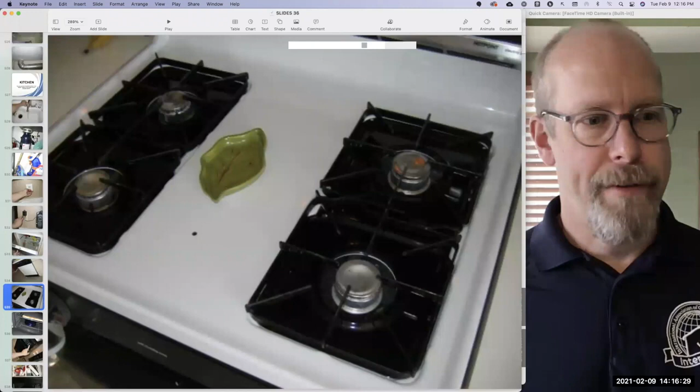Gas stove shouldn't tilt, have its safety device. The burners turn on and off, the oven. I don't bake anything—I just make sure that everything turns on and then off.

The same thing with the microwave. This doesn't exhaust outside—ideally it would. It's filled with debris or personal items, so I can't see what's going on. And there's a little cosmetic thing with the trim.

And that's it for the inspection itself. Those are all the inspection images. Now is the report itself. I'm just going to go through it real quick so you get a feel for what our inspection report that I would write looks like.

A lot of pictures—more pictures, the better. So I put 3 in a row. I take pictures in groups of 3: far away, 3 pictures far away of a system, then I move in halfway and take 3 more pictures, and then I move in to where I can actually touch them and take those 3 pictures.

Roofing, roof covering system, right? The roof is a system, and then the components of the system are listed in the report, and that's how I inspect. So roofing: method of evaluation, estimated age, the condition, the number of layers, the flashing, the ventilation, and gutters and downspouts. Exterior is another part, another chapter.

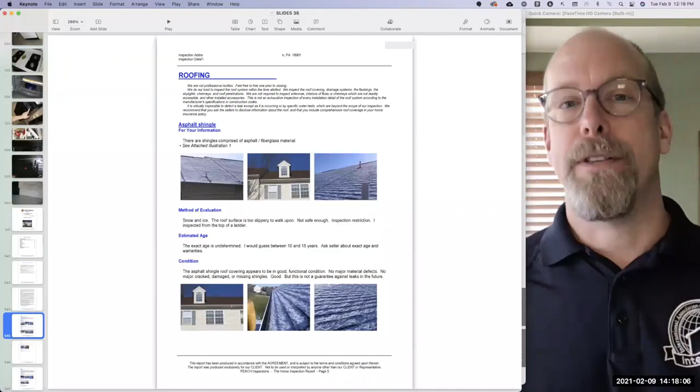It also flows the standards of practice and also flows with the inspection process. I did the report with the roof first because that's the first section in the standards of practice, I believe, and that's the first section that I inspect. I inspect the roof first—that's the first chapter in my report.

I inspect the exterior second—that's the second chapter in my report. System and then components. Exterior system: surface water management, the grading, the sump pump, the window well, the house wall conditions, the house wall coverings, exterior components like the driveway and the parking, the patio and the porch, steps, handrails, exterior faucets, receptacles and GFCIs, public gas meter, dryer vent hood, garage.

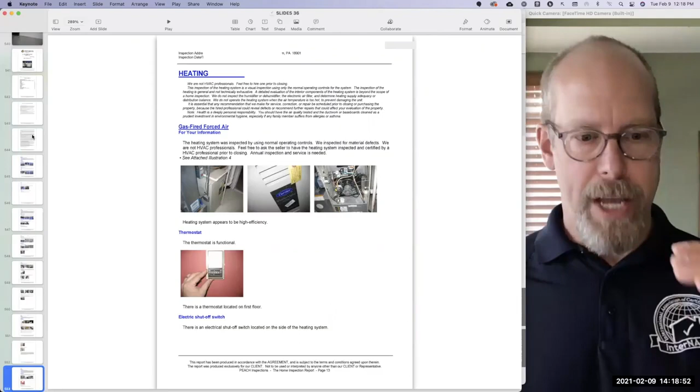So it's system and then components, like heating system. Describe this type of system as gas-fired forced air. Components: thermostat, electrical shutoff switch, gas shutoff valve, gas burners, flue connection pipe, air filter, service record, estimated age.

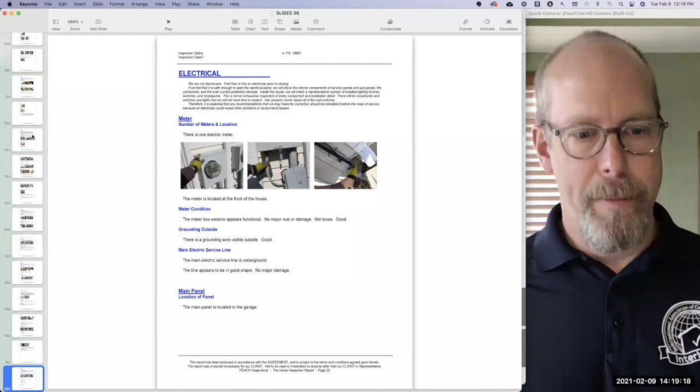And there's the air conditioner, there's the plumbing, there's the shutoff valves, hot water tank, electrical system with the components: meter condition, grounding outside, main electrical service line, disconnect, breaker sizing, breaker label, wire labeling, wire type, circuit breakers, inspection sticker, and there's the basement.

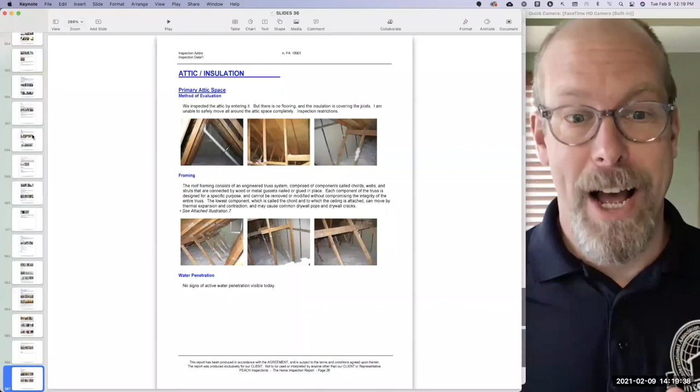I like to put those inspection restriction pictures right in the report so everybody knows the condition of the home. That was the inspection restrictions that I had to deal with during the inspection at the time of the inspection.

And there's the attic and the insulation and the bathrooms, a different section there with all the bathrooms grouped together. I like that. There's the laundry. There's the interior stuff like carbon monoxide detectors, smoke detectors, windows, doors, receptacles, walls, ceilings and floors, and stairs. And then the kitchen is the last section of the report with the components of the system of the kitchen there.

And then looks like I had recommended asking the seller of the property about a wall switch apparently missing, located near the garage interior door. Oh, interesting.

And then I had an absentee client, so my client was actually not at the inspection. So I wrote, we prefer to have our clients present during the inspection for a few reasons, including we can answer all of your questions and address your concerns as they come up. We both can see the condition of the property at the time of the inspection, and I can elaborate on what may be complicated or technical. As much as you were not present during the entire inspection, we encourage you to read the whole report, not just the summary, and consult with us directly. Call us anytime. You can hire us again for a walkthrough prior to closing. Also, please verify anything that we may have said orally but may not have documented in the report.

That's kind of cool. And there's the standards of practice, just a brief copy-paste of the important parts, but you've got to have that link to the standards of practice on the website.

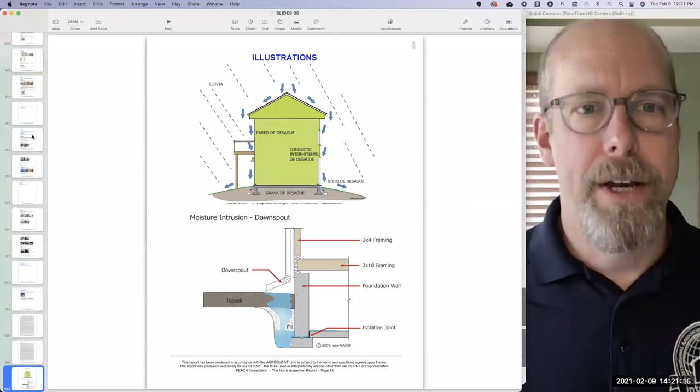And there's illustrations, so you can add these illustrations if you wanted to. I put a few illustrations in there, like the hot water tank, the grounding and bonding and notching of a floor joist, and the radon mitigation system illustration.

And then report conclusion. I try to be very clear about what we do and what we don't do. For example, it says we've made every effort to provide you with an accurate assessment of the condition of the property and its components, and to alert you to significant defects. However, we may not have tested everything or opened everything or identified every problem. And because our inspection is essentially visual, latent defects could exist. We cannot see behind walls. I love that sentence. Therefore, you should not regard our inspection as a guarantee or a warranty. It's simply a report on the general condition of the property at a given point in time.

As a homeowner, you should expect problems to occur. Roofs will leak, basements may have water problems, and systems may fail without warning. We cannot predict future events. So I like that type of setting the expectation, especially in a report conclusion. This isn't a warranty, and I'm not guaranteeing that I can find every defect, and something might happen, like roofs leak. If the roof leaks, well, it certainly wasn't leaking during the inspection. Otherwise it would be in the report. And I'm not responsible for future weather events, especially.